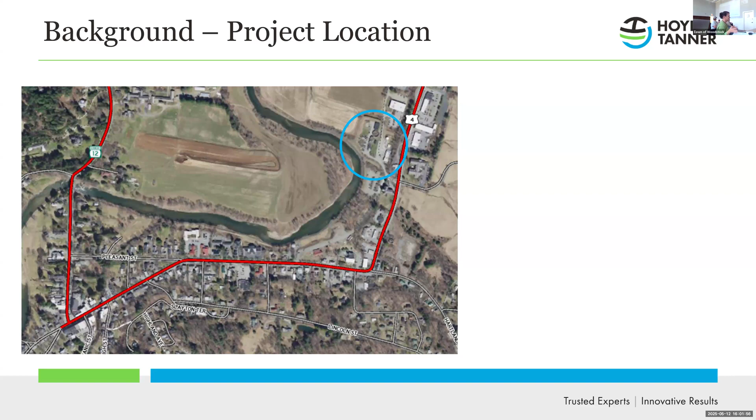So I'm gonna read off of this. All right, let me just give a quick background. We're here to talk about—this is kind of like our 60% review meeting. What has been done today, I'm not gonna go through the background of the project location. I think you all know where your treatment facility is located here in town.

So just a quick background: in May of '23, we finished the preliminary engineering report and submitted that to the state, and we got comments on that. Last year, May '24, we proceeded with Step 2, final design services, which was collecting field data. We've done some surveys and geotechnical investigations of the site.

We were also under contract to do some public outreach, and then things got put on pause a little bit while you were purchasing the water department, so we took a pause. December of last year, we came here in front of the select board and said we would like to look at some other alternatives for the biological process.

We had that meeting and came to the concept of proceeding with final design up to a 30% point. Then we would go for a bond vote because we'd have a better number.

So here we are—we have amended the PER by looking at three biological treatment processes, and that's what I'm going to present today. My goal is to present those to you and to come away from this meeting with a direction for the biological treatment process for the final design of the facility.

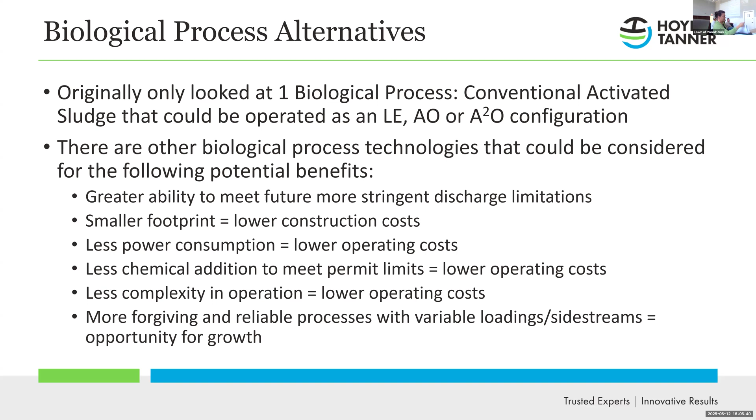Okay, so we can go ahead. The three process alternatives we looked at, which are in the report, are the A2O process—which is anaerobic, anoxic, oxic—the sequencing batch reactor, which is the same technology you have at South Woodstock, and aerobic granular sludge, AGS. We had Aqua-Aerobic come in and present on SBR versus AGS.

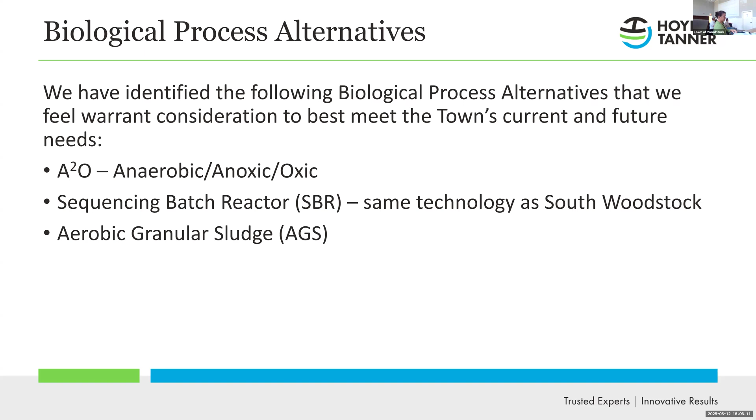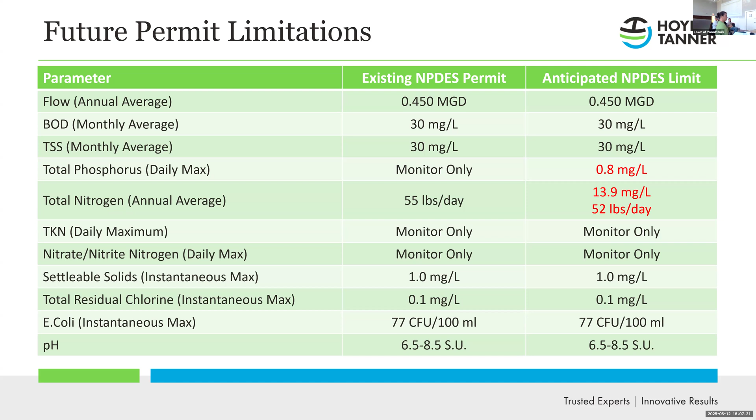What this does not have is a total ammonia nitrogen limit, which we're starting to see on the Connecticut River basin and across Vermont. What will happen is in the next permit that's issued, there will be monitoring requirements. They need to collect data to know what the limits should be for the plant.

Go ahead. Biological processes. So, go ahead.

So an A2O process follows conventional activated sludge in the sense that you have different zones of aeration tanks. You'll have an anaerobic zone up front, which means absence of oxygen - it's just mixed. After that, you'll have an anoxic zone, which is mixed as well, but what happens is you start to reintroduce a nitrate recycle into it to bring nitrogen-rich bacteria back into the process. You then go into an aerobic zone, which is where you put your air in - that's your compressors. This sets up the conditions for biological phosphorus removal and ammonia removal.

And then it goes into your secondary clarifiers, and you have a return - RAS stands for return activated sludge - which comes back to the beginning of the plant, and that brings beneficial biology back to the beginning of the plant for those treatment processes to happen.

The advantages of this system are that the anoxic zone allows for alkalinity recovery, reducing the need for any pH adjustment chemical - those are usually sodium hydroxide or magnesium hydroxide. The internal nitrate recycle, the NRCY line, increases your denitrification rate, which is needed for total nitrogen removal to hit that limit in your permit.

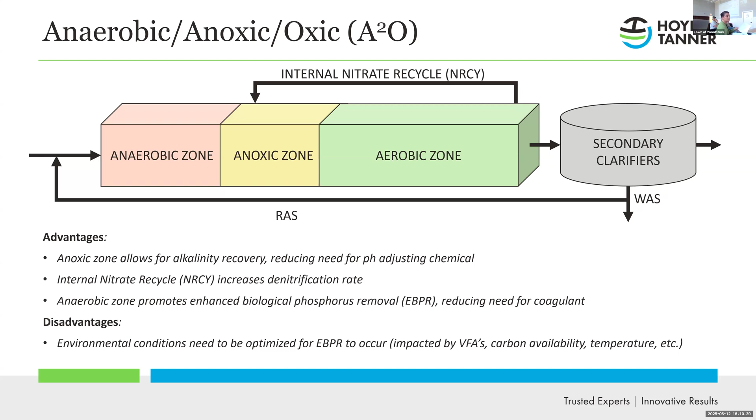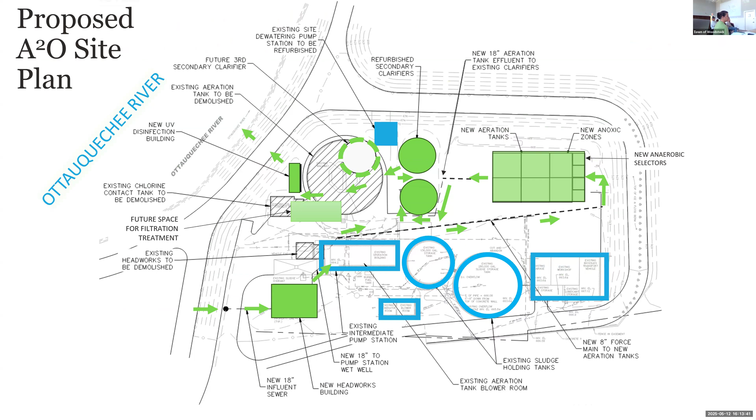I'm going to pause here for a second. I also want you to note that we tied these construction costs to the Engineering News Record Construction Cost Index. These are tied to March of 2025.

And later when I present full project costs, you'll see that I have escalated those to a projected construction date of when the project would go out to bid.

The other thing to note is that these costs include a contingency for what we call BABA, which is Buy American, Build American, or Build American, Buy American.

That is the infrastructure law that was passed by the previous administration to jumpstart the economy. There are federal requirements to procure your raw materials and equipment in the United States, and the compliance associated with that has driven costs up.

So we have readjusted. The reason you're seeing higher costs than previously is to account for that. Those are real costs that the contractor has to factor in, and the manufacturers have to factor into their price. They have to basically get certification on every single piece of the plant.

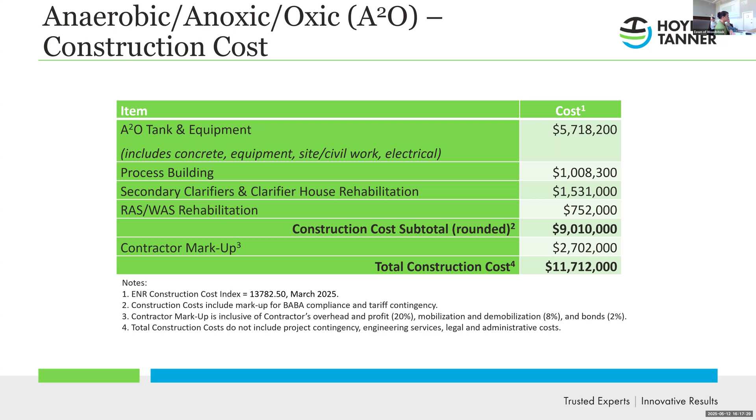The second technology is aerobic granular sludge. I'm not going to go through all of this because we had a whole presentation with Aqua-Aerobic with you. But basically, this is a dense sludge created at a much higher mixed liquor suspended solids. I'll just reiterate for the record, the advantage of this is that all the treatment happens within this singular granule, so you don't need all the separate tanks.

You don't need to have a tank that has no oxygen, and you don't need the tank that has the recycle come back to it, and you don't need the tanks that have the aeration. It all happens in one tank in a batch type fashion. So that eliminates large tanks, it eliminates the clarifiers, and because all of this is happening biologically inside the granule, you have reduced chemical costs.

It can handle high strength supernatants off of the holding tanks and off of the dewatering equipment. And it has a smaller footprint. This process would come with a manufacturer's guarantee, process guarantee, and aftermarket service.

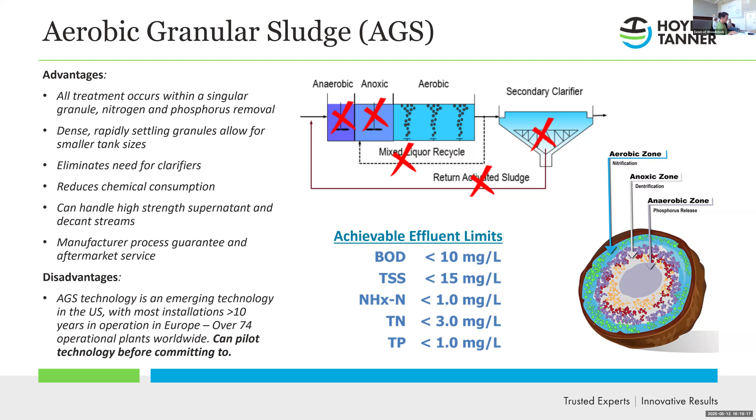We listed as the disadvantage that it's an emerging technology. I don't think we see it as an emerging technology so much anymore. There are plants that are being commissioned all around the country and all across Europe. And so it really is starting to take off. So I don't actually see that as a disadvantage.

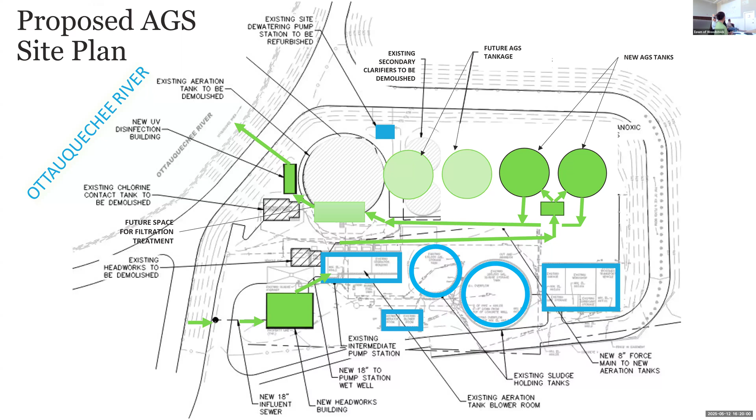So basically, it's a lot smaller of a footprint, and after the clarifiers are demolished and the existing aeration tanks are demolished, it gives you a lot of room on the site for future expansion of the plant, if that is where the town chooses. Go to the next slide.

So the capital costs associated with this technology: there needs to be a pre-equalization tank that just kind of levels out the flow before it hits the tanks for the AGS. That's about $500,000. The AGS process, including all the concrete for the tanks, equipment, civil site work, electrical work, about 4.1 million.

That process building, same for all three examples, is around $1 million. So with a subtotal for construction costs at 5.6, contractor markup, this is about a 7.37 M alternative. Go to the next one.

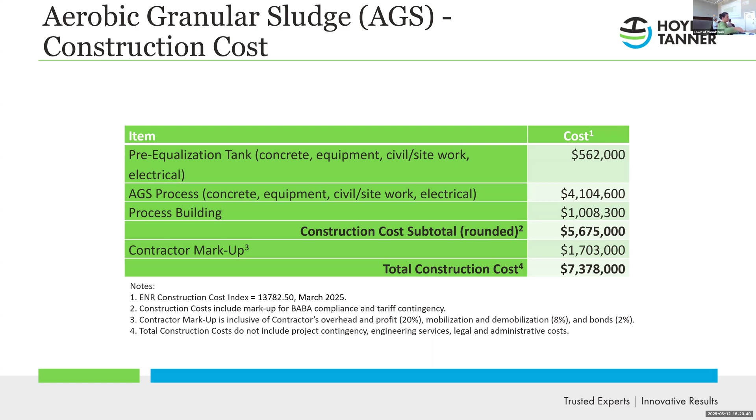SBRs, same technology you have down at the South Woodstock facility. Again, it's a small footprint because it's all in one tank. And it's more of a conventional activated sludge. It's the same steps that are happening in the first alternative where you have an anaerobic time, you have an anoxic time, you have an aeration time, you have settling. It's just all happening in one tank.

Advantages of this is that it's standardization for the operators. They know the facility at South Woodstock would be the same kind of operation. They're familiar with it. There's a process guarantee and aftermarket service. Aqua-Aerobics has a very good track record with that. It eliminates the clarifiers, gives you space on the site for future expansion because it's kept very modular, just like AGS. And that batch process, like I said, takes place in one tank.

And one of the good advantages of this, it's the same with AGS, is that you can vary the cycles to account for variations in incoming flow, variations of strength if it needs to be aerated for a little longer because it's coming in high in nitrogen or high in ammonia, or if we have wet weather, it can go into storm mode.

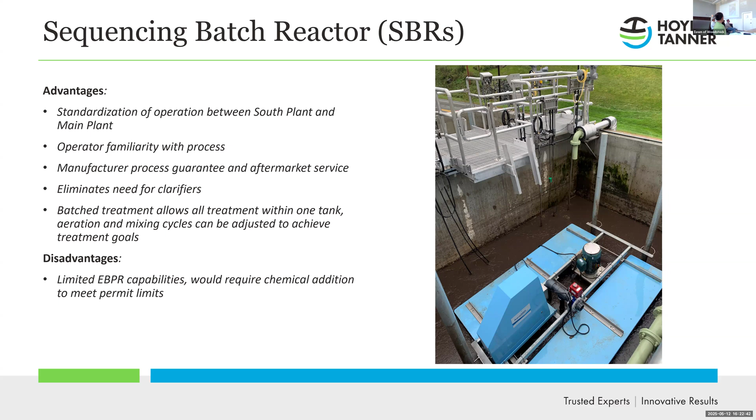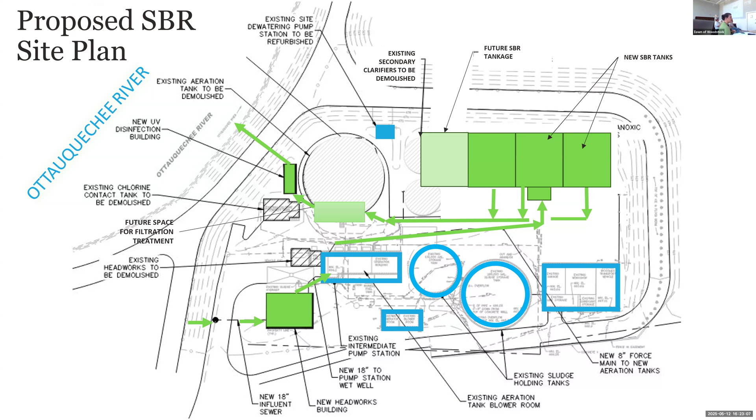And again, on site, I'm showing three. I think in the report we're calling for 2 SBRs with a pre-equalization tank, but that just shows you how those would lay out on the site. A little bit larger footprint. The cost estimate that I'm about to share with you is for 2 tanks, not 3. Okay. We'll go to the next.

And then the cost estimate for this: that pre-equalization basin is a little bit more than it would be for AGS because it needs to be a little bit larger for the batch cycles. The SBR process, all the concrete, equipment, civil site work and electrical, about 4.2 million.

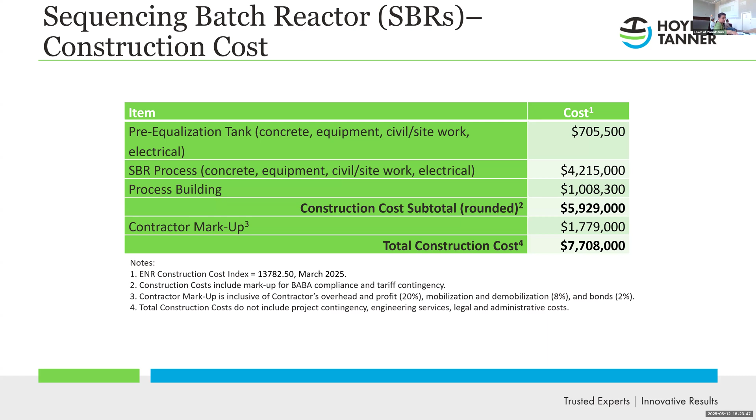Again, the process building around $1 million for a subtotal construction cost of 5.9. Contractor markup, this is about a 7.7 M alternative. So we can go to the next slide.

And this is where what I'm not presenting to you is all of the sausage making of how we determine O&M costs. But to do a present worth analysis, the first thing we do is we look at what is the connected horsepower of all the equipment, and we compare it across all the alternatives at the same flow rate. Okay, so it's connected horsepower that's a factor in the O&M cost, and that's all in the report.

It's chemical usage. How much chemical is associated with each different alternative? Like I said, SBR is going to have the most chemical consumption because it can't do biological phosphorus removal as well as the others. And then man hours. Which one's going to be more operator hands-on than the others?

And so the top line is the capital construction cost that I just presented, 11.7, 7.4, 7.7. The next line is the annual estimation of O&M costs for each of those alternatives. And we then plug that into a formula to calculate present worth, which is a 20-year evaluation, looking at it over 20 years and with a depreciation. And you'll see that the present worth of alternative two is the most favorable over that 20-year lifespan.

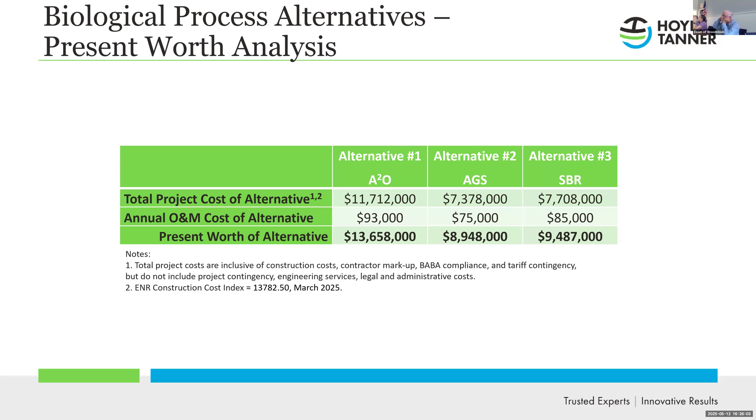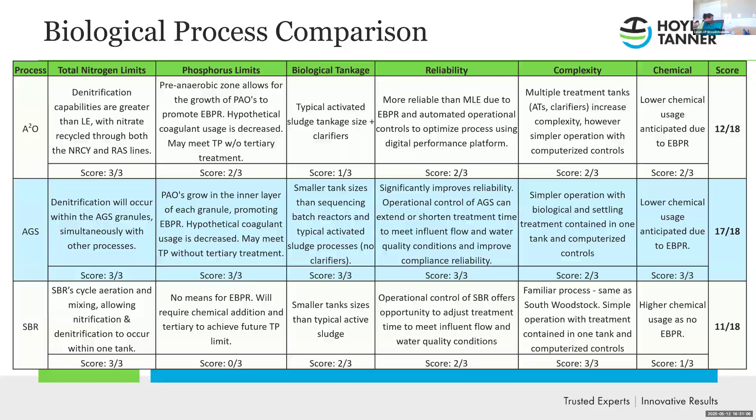So one other thing we took a look at for this PER is we opened it up for some dewatering alternatives. You currently contract dewater right now, and the thought is that the price to hire Paul Senesac to come and dewater your sludge is going up and up and up, and he's the only game in the state of Vermont. So you are beholden to whatever he charges you, and his prices have been good. So I took a look at what could we do at the plant? What could we do and what would be the payback?

So talking with Tim, we looked at a few different alternatives. We came up with a rotary press. I can get into all the mechanics of it. A rotary press operates at a very low RPM, and basically you're just squeezing. It applies pressure, it rotates very slowly, and it's squeezing the water out of the sludge. Very low horsepower. There's a few of these facilities in the state of Vermont. Town of Richmond loves theirs. Brattleboro has one, they love theirs. The guys in Richmond turn it on, they go home for the night, they come back the next morning. It's a very reliable piece of equipment.

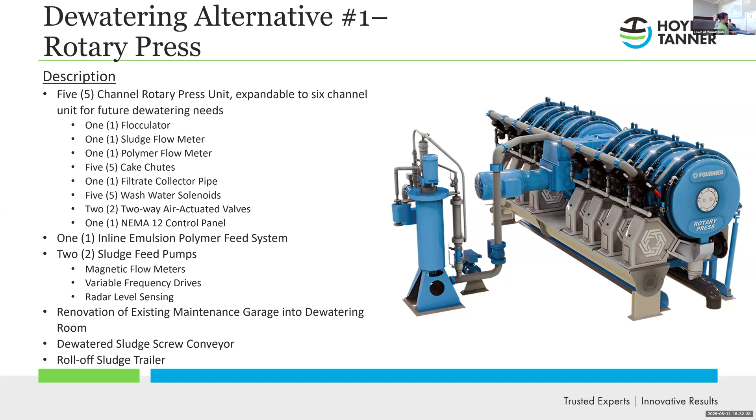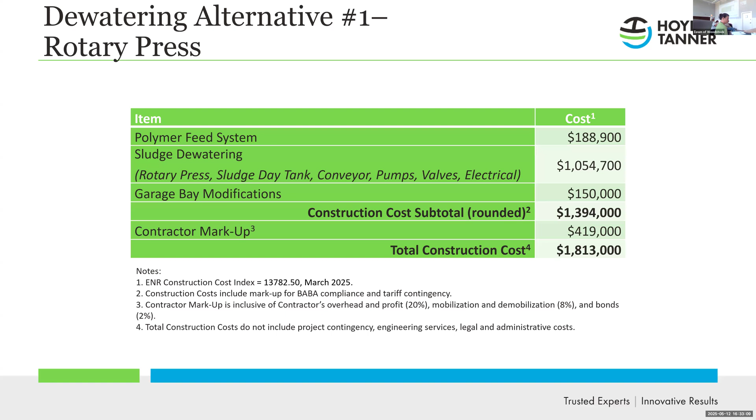The next slide is just what that cost would be. We were looking at retrofitting one of the bays of the maintenance garage. Not a new building, but could we put it in there and just do some minor improvements to the building, HVAC, things like that, to be able to add dewatering. So for a total cost, you'd have to add polymer. You add polymer to sludge to help it come together. So total cost, I'm just going to go to the bottom line, it's about 1.8 million for a dewatering alternative.

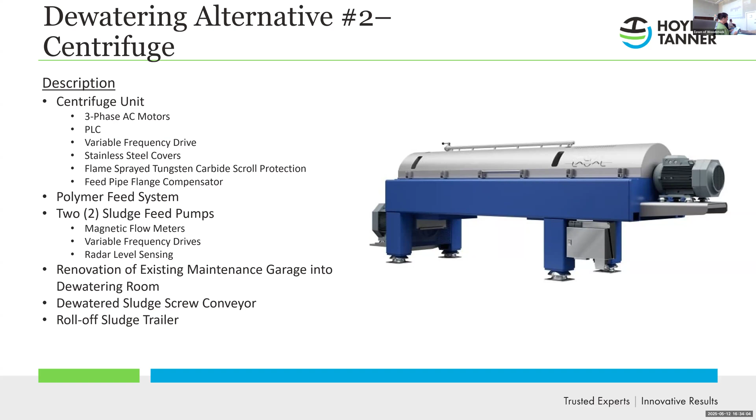The second alternative is the centrifuge, and the principle of how this works is the centrifuge spins at a high RPM and basically forces the water out. If you think of those amusement rides where you're spinning around and it forces you to the outside, a centrifuge is forcing the water to the outside; it spins at a very, very high RPM. There are many centrifuges around the state of Vermont, and facilities use them quite reliably. They're a little bit more hands-on, and a lot of operators don't feel terribly comfortable with a piece of machinery like this spinning at tens of thousands of RPM on its own. But it is a reliable technology. So we took a look at that. Go to the next slide. The total cost of that is about a $1.6 million investment.

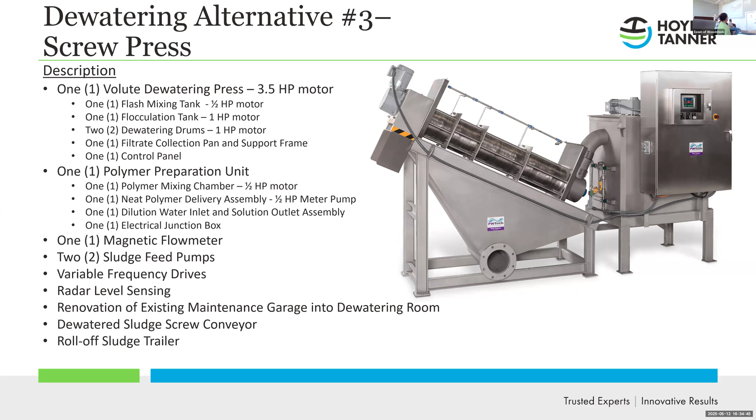Okay, so the third alternative is a screw press. Basically this is a pressing technology. The screw is just forcing the sludge to an area of compaction, so it is squeezing the water out too. The screw just presses it to the end. These are very reliable. They have them all over New England. Many people love these. Again, this is one that people walk away from. Turn it on, set it up, come back at the end of the day or the next day. They operate very independently. And the price of a screw press is about 1.5 million.

So if we go to the next slide, just a comparison of them all. Again, the first line is the capital cost of the equipment.

The second line is the O&M, and as you can see, a rotary press is a lot less expensive in annual operation and maintenance, due to the fact that it's like a half horsepower motor. It does not require the same kind of motors as the centrifuge, which usually has two motors, for the main scroll and the back scroll, usually around 50 to 75 horsepower each. So that's the big difference there.

The screw press also has a pretty big motor to drive the screw. Polymer cost is going to be about the same across the board. So it really is the electricity that is driving the O&M cost.

I think we also argued that the man hours at a rotary press would be less than they would be at a centrifuge because you can walk away from them. So with the present worth over 20 years, you can see that alternatives 1, the rotary press, and alternative 3, they're about the same, 2.5. It's about the same. So that's what we came up with for some dewatering alternatives.

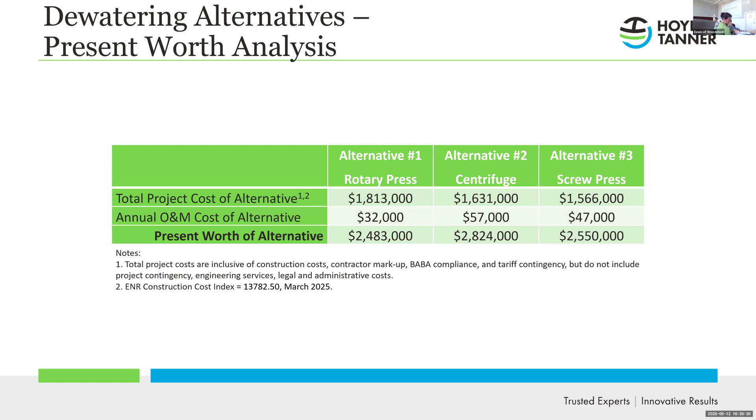So the next thing I wanted to do was just a simple payback. Like what would this mean for the town in paying back, how long would it take? And this is hard to read.

But basically what we took was the amount of sludge that you're dewatering right now, and what is the unit cost to dewater that sludge right now. And then we factored into the price - this is based on real numbers from Paul Senesac - what it cost him to mobilize and demobilize, so there's an annual dewatering cost. This doesn't even account for disposal costs, this is just to dewater.

And we escalated those prices over the years to account for inflation, because we saw a real jump in Paul Senesac's cost. So we used that as the basis and escalated each year. By doing that, we came up with about a 9 to 10 year payback, depending on which alternative is chosen.

And there still is a cost to dispose of your sludge. All 3 of these alternatives would result in roughly the same amount of cake solids, which could be improved with the right type of polymer. So I don't think one is going to have a drier sludge than the other. You could get to the point where you actually pilot it on your sludge, depending on what kind of biological process you use - dewatering equipment can be piloted.

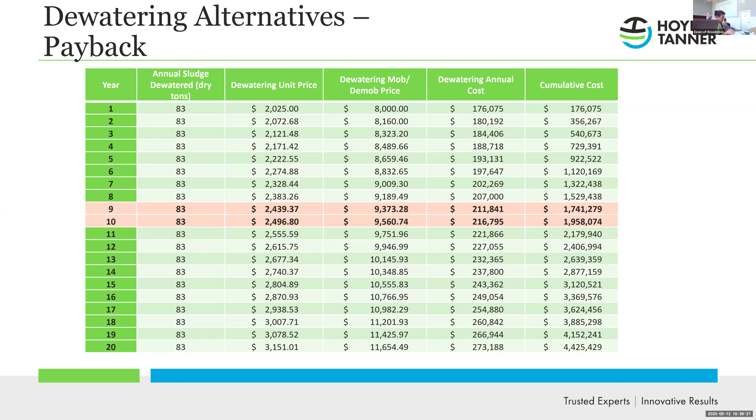The prices have gone up, as I mentioned before, because we adjusted them for BABA compliance and for tariffs. We don't know what tariffs are going to do, but anything that is not concrete, gravel, or PVC pipe, which is made domestically, we added 20% to it. So these costs might seem alarming, but they have some serious contingency built into them, which we think could be real or may not be real.

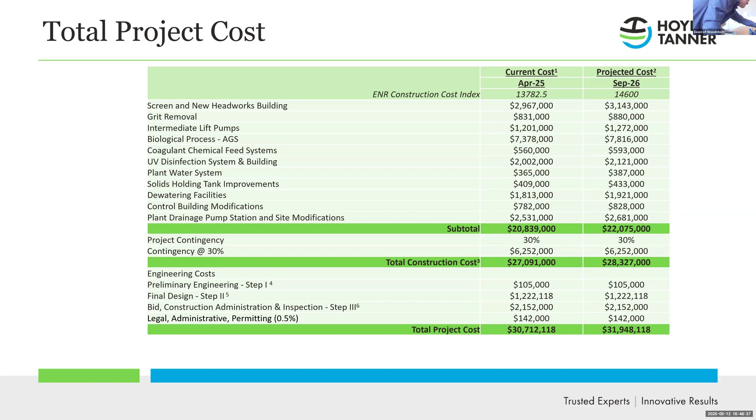I don't know if we have any more slides. Push the 9. Just push the 9. Or the 3, so 3 over there. That's the page down button. There you go. Go one more, hit it one more time.

I think what I'd like to leave you with is I'd like to see you advance into design so you have a shovel-ready project ready to go from when the town's ready.

And I want to stress, your plant doing nothing really isn't an option. We have stated what the condition of the plant is, and the state has seen that condition report on the plant. They believe you are acting in good faith to upgrade your facility in some capacity—not hydraulic capacity, but in some form or fashion—so that you do not have permit violations.